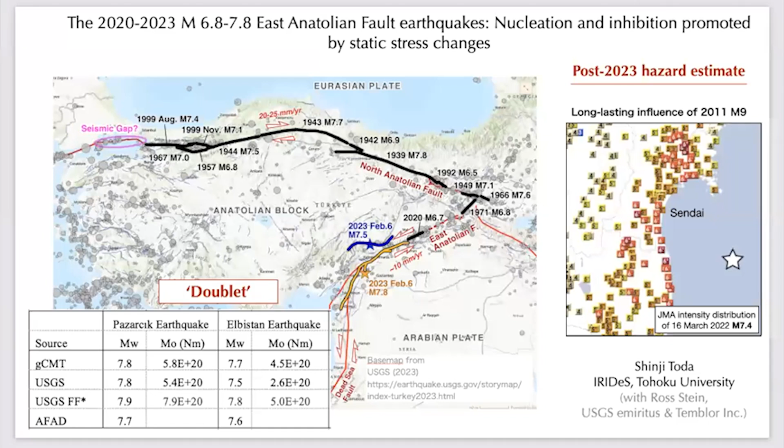We had magnitude 7.4 and 7.3 earthquakes that struck Sendai last year and two years ago, and the influence of a large earthquake often lasts longer than decades. So what about the situation in Turkey? Today I'd like to briefly introduce the seismic hazard after the 2023 Kahramanmaraş earthquake. This is very important for the recovery and reconstruction process for cities damaged by this earthquake. To do this, fault interaction becomes key to evaluating the hazard.

We realized the fault interaction in the February 6th earthquake sequence itself at the beginning. It was what we call an earthquake doublet - two similar-sized events occurred within 9 hours of each other.

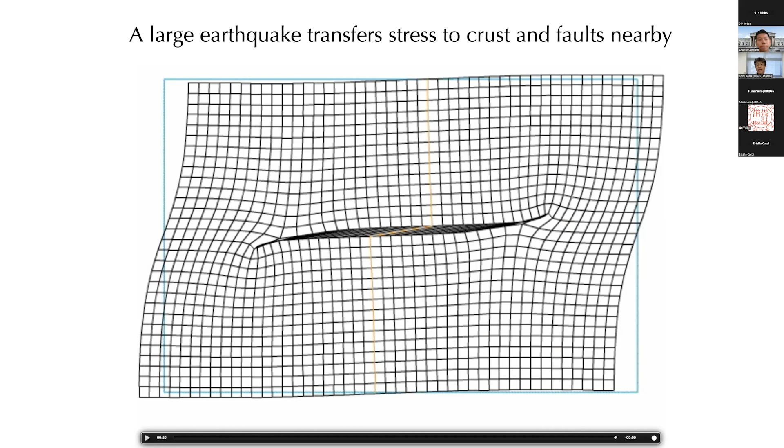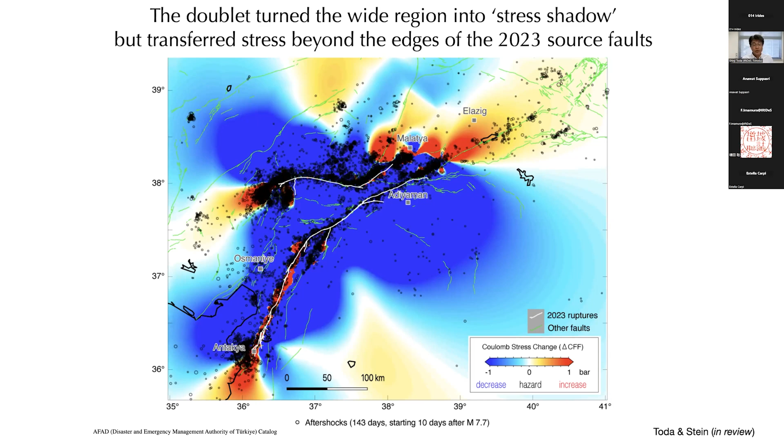As I said, some of the red spots are just beyond the edges of the ruptured planes. There are many aftershocks, of course, and this would be the next large rupture.

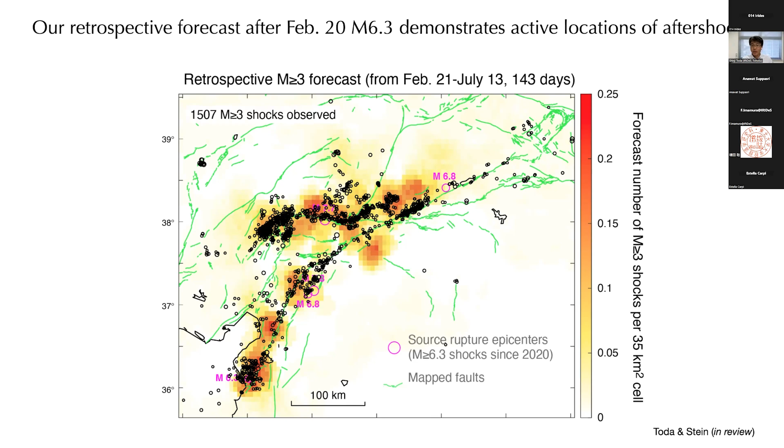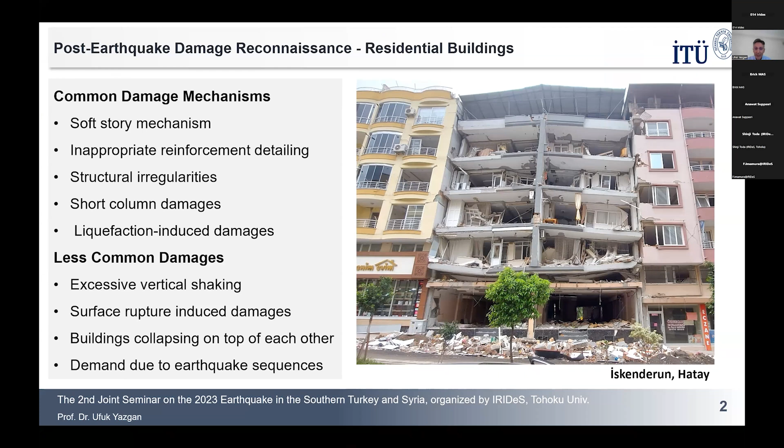One of the most common damage mechanisms observed in the region related to residential buildings was the soft-story damage mechanism. It's unfortunately a typical damage mechanism for building stocks in urban regions of Turkey. On a popular street, commercial businesses are typically located at the ground story, demanding large commercial areas there. This often limits the availability of resistant structural elements on the ground floor, creating softer floors, and we observe soft story damage and collapses of the ground floors of such buildings in seismically active regions.

Unfortunately, even though my title says lessons learned, this is nothing new. Such damage had already been observed after several earthquakes in the past, and there's no new lesson about it. The soft story damage mechanism for our building stock is one of the most critical and has been known to trigger lots of failures. It's very unfortunate to see it repeating itself over and over again.

Another common damage mechanism was inappropriate reinforcement detailing — lack of confinement, lack of the 135-degree bend of the confinement bars, which are very critical for ductility.

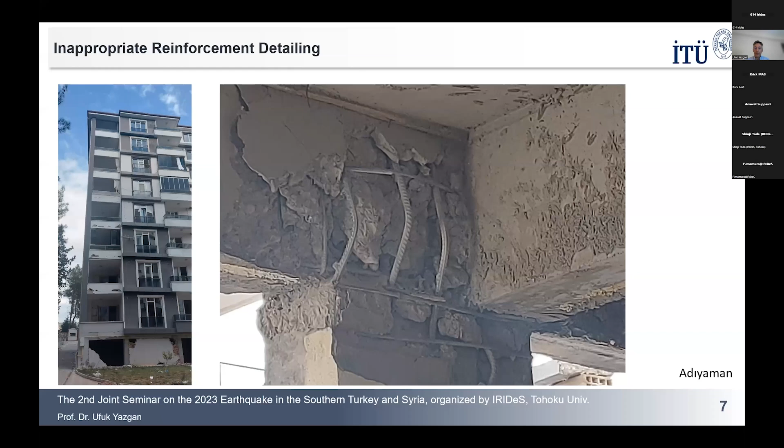So this is a building from Islahiye, Gaziantep with improper confinement detailing, reinforcement detailing, but unfortunately it was widespread around the region. This is a beam column joint constructed in the Adıyaman region, again with the lack of confinement in the beam column joint region. Unfortunately, again, there is nothing new about this. It's very unfortunate to say that these lessons should have been learned in the early earthquakes, so there's really no new lesson to be learned here, I should admit.

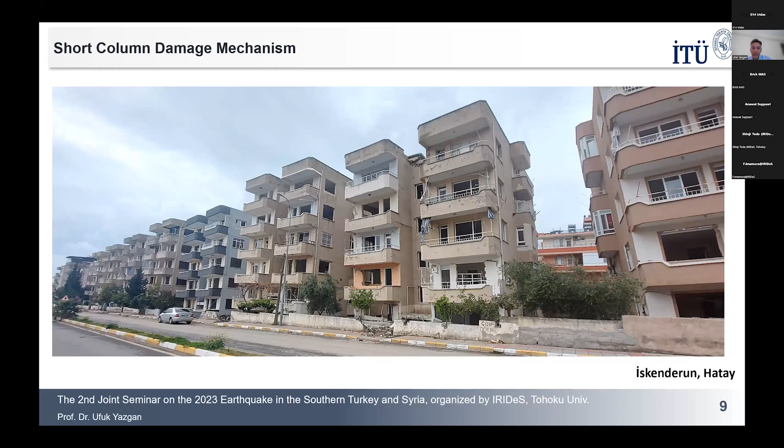Another very common damage mechanism observed in the early earthquakes was also observed in this one: short column damage. Typically those structures with ground floors that are a little bit flexible tend to be located partially in the basement level, sometimes fixated with the presence of infill walls, and these rigid elements limit the capability of the structural system to deform and go into the expected nonlinear action. Unfortunately, due to the rigidity of such supporting elements, this nonlinearity takes place in a totally unconfined and unexpected place, and this triggers losses. Sometimes these failures are repeated for large sets of buildings distributed over a full street or avenue, and when you look at the same pattern repeated at the basement floor, you again see the same error repeated over and again. Unfortunately, there's nothing new about any lesson learned here.

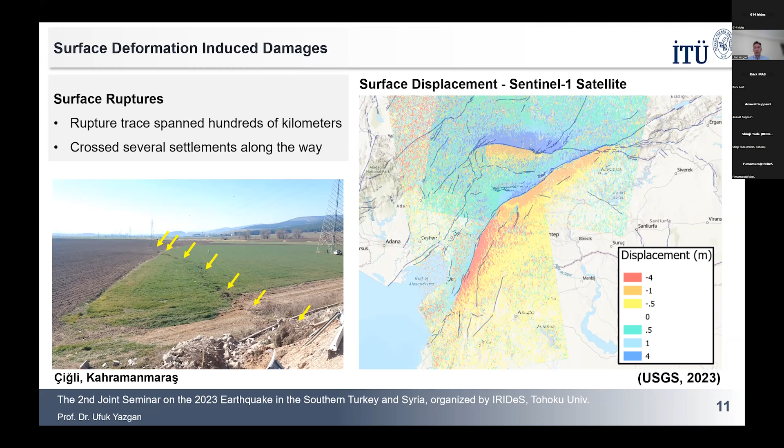But then there were some interesting phenomena that were not observed by myself, at least, in earthquakes in Turkey before. One of them was very long traces of surface ruptures due to such large magnitude events, a sequence of events actually with two main shocks. We have very, very long segments of surface ruptures and surface fault traces that pass through various settlements, and it was interesting to observe that such long traces, hundreds of kilometers of fault traces, damage structures in relatively different ways than typically anticipated for large magnitude events in the common seismic design codes in Turkey.

For example, this is a settlement called Çiğli in Kahramanmaraş, where the fault rupture trace just passes through the entire city diagonally, the entire settlement village diagonally, and then all the structures had significant settlements at their foundation levels.

Of course, these are the ones directly at the rupture, but the surface deformations are not only limited to the rupture. In some cases, you really observe large settlements and differential soil movements 4 or 5 kilometers away from the fault. This triggers both structural damage as well as non-structural damage, which can also be critical to structural systems located around infrastructural elements such as retaining walls, tunnels, bridges, and so on. When these systems interact in their response against earthquakes with neighboring buildings, it creates a problem. We have been studying these differential support settlement effects in buildings for some time in our group, so it was quite interesting to observe that.

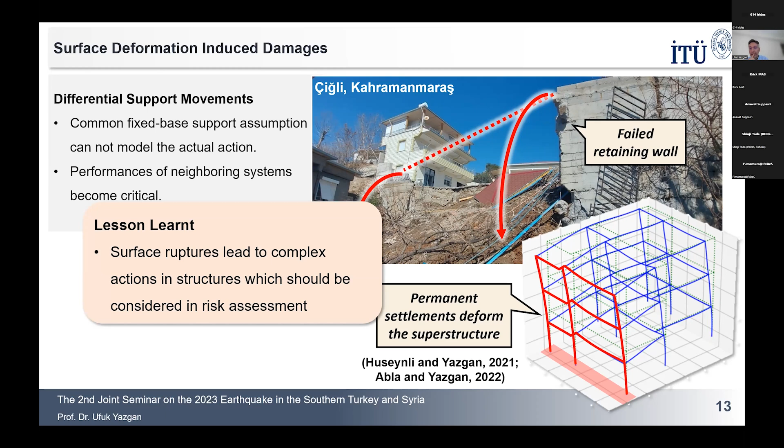It basically teaches us a lesson about very large intensity but rare probability, rare frequency events. It looks like those events cannot be just captured by changing the design acceleration levels as we do today. It looks like those large intensity events essentially trigger also very significant surface deformations at the support of the buildings, and these should be handled very carefully by engineers using some other innovative approach to deal with them.

Another thing that became quite common after this earthquake is that in regions with large densities of population, buildings collapsing on each other also triggers significant amounts of losses. This is a photo from Elbistan, Kahramanmaraş, which is at the epicenter of the second earthquake. This damage in this RC wall is non-expected earthquake damage, essentially, because it was created by a neighboring building just falling on top of this one, which collapsed not only onto that structural wall but also onto several structural elements at different locations of the building.

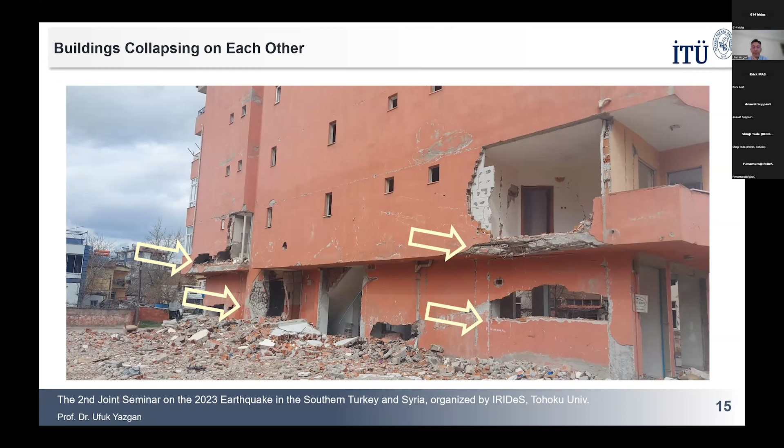This shows that the safety of the structure as the engineer designs it is not only controlled by the structural parameters of the building itself, but the risk and post-earthquake functionality is a function of the performance of the neighboring building. Also in this case, the neighboring building just collapsed into the ground floor of this building, which is not a pounding type of damage. It's just direct collapse, and it punched the ground story columns of the building next to it.

So basically, for buildings located near high-risk structures, separation distance needs to be considered in risk assessment. This is not related to pounding on the structure, where buildings impact each other during vibration, but due to the fact that the next building can collapse onto the other one, which can trigger significant losses.

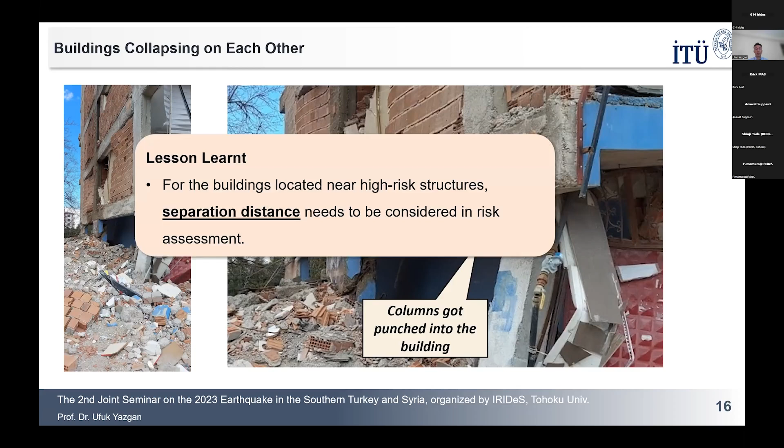Also, in some cases, the collapsing of non-structural elements creates large problems. For example, in this case, we observed non-structural debris falling onto the evacuation roads of people trying to get out of the building.

This was an earthquake sequence, with two earthquakes arriving with a time difference of 9 hours, followed by a very active aftershock region. Of course, people need to get out of damaged buildings as fast as possible, but it looks like non-structural elements located on evacuation roads are something we, as engineers, should think about more carefully, particularly designing them against high-intensity accelerations.

Another interesting observation related to this earthquake was the excessive vertical accelerations that were recorded and observed. Here you can see a building in Antakya, Hatay city, which had very significant damage located in the weak zones at the tops of the RC walls.

This is a relatively unexpected damage failure mechanism for an RC wall to have such an impact, but you can see it at all the columns of all the RC walls of each story. This damage mechanism is repeated.

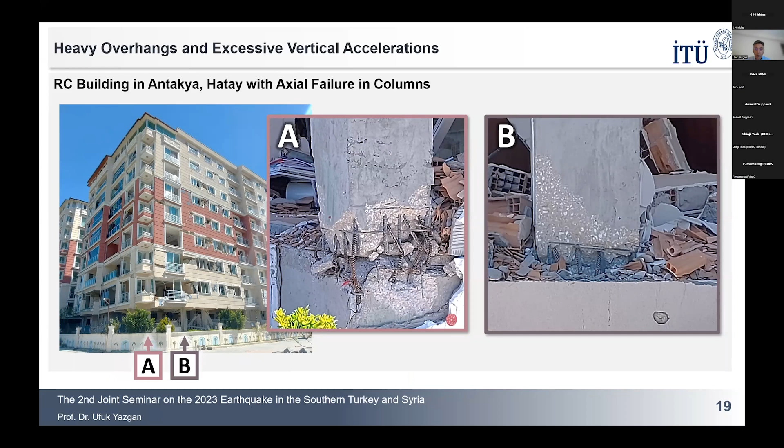At the bases of the structural column elements, we had very sharply divided individual cracks that had opened during the earthquake. Also, at the relatively heavier weight cantilever elements, we observed significant traces of structural damage.

All these damage patterns indicated that there should be quite a large vertical component that excited those buildings. The security camera footage from the region also confirmed that.

We can see security camera footage from the entire region, where at the very last seconds of the recorded sequence, we can see cars jumping in the air due to vertical acceleration in the parking lot. The acceleration recordings obtained in the region confirmed this.

For the AFAD 3123 station, for example, the vertical acceleration exceeded the horizontal components. 0.88 G was the vertical demand, whereas 0.61 and 0.67 were the horizontal ones.

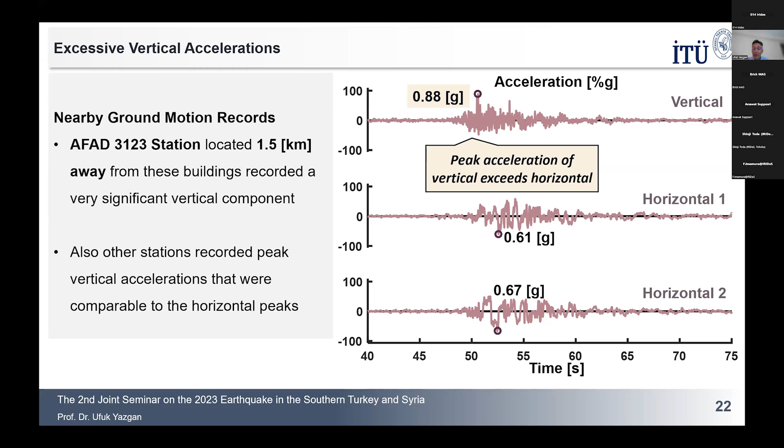What is more interesting to note is that the vertical acceleration actually arrived at the structure a little bit earlier than the horizontal shaking, because in seismic design and assessment of structures we typically focus on just identifying the peak amplitudes of the demand. But the sequence of arrival of those demands is also a critical factor, which is not always taken into account, particularly for vertical acceleration.

We observed that for large intensity vertical shakings, the arrival time difference tended to be, on average, positive. For larger vertical accelerations exceeding 0.3 G, the vertical demand arrived a little bit earlier, at least a couple of seconds earlier than the horizontal one, which may indicate that before the horizontal loading intensifies at the design level, we may have significant vertically induced damage in the plastic hinge regions, which may be quite important.

There are some mechanical reasons for that behavior as well, related to the fact that P waves, which transmit vibration to the surface, arrive much faster than S waves and tend to attenuate much less. We are currently working on this effect, and the amplitude and arrival times of vertical accelerations are critical. This is a key lesson learned from this earthquake.

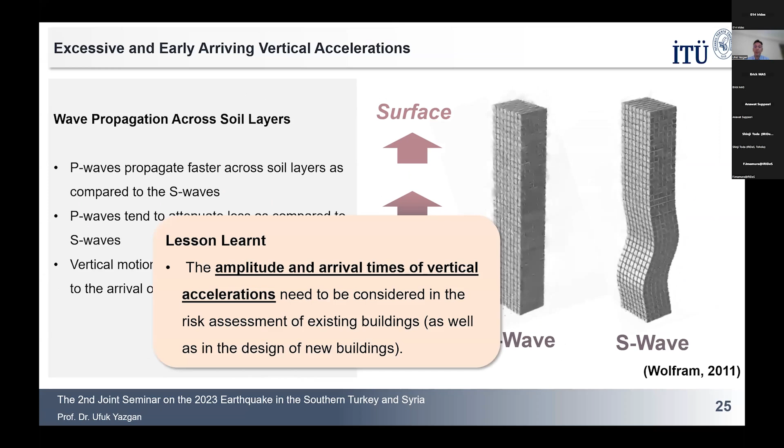And then, of course, another key issue, as addressed by the fellow speakers, was the fact that this earthquake was a sequence.

Large earthquakes distort the stress fields around them, and tend to trigger other main shocks. As earthquake engineers focusing on the design and assessment of buildings, we should take into account the fact that doublets of earthquakes can occur, where the excitation is repeated over and over again, because this is a fact for low probability, high amplitude earthquakes.

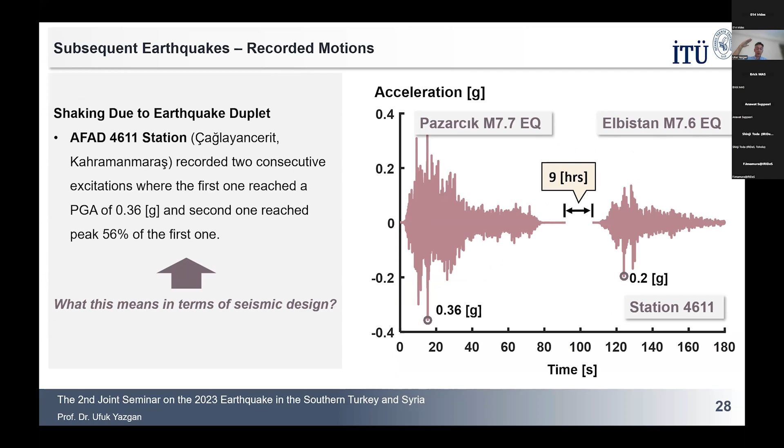It looks like for high magnitude events, which distort the stress field in neighboring faults, we should take into account the fact that potential losses may be triggered due to an earthquake sequence rather than an individual earthquake. I would like to acknowledge all the organizations and individuals that contributed to this investigation, and thank you for this opportunity and for organizing.

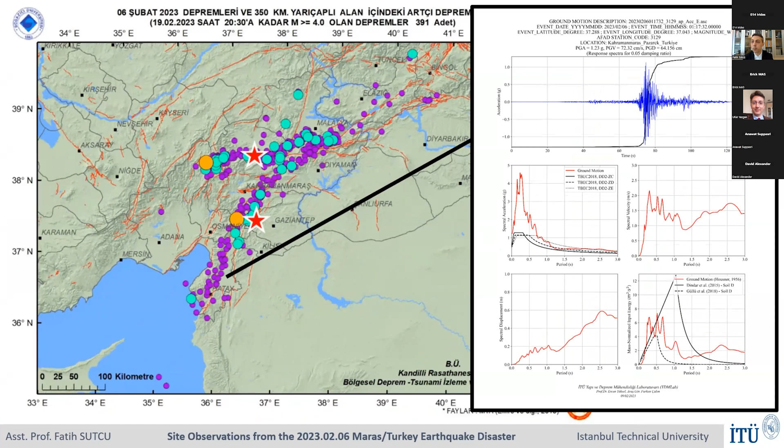This is the Maraş area, and I will show you lots of photos from there. The recorded PGA here is 1.23 G, which is quite large. And for the Antakya area, it is approximately 1.2 G.

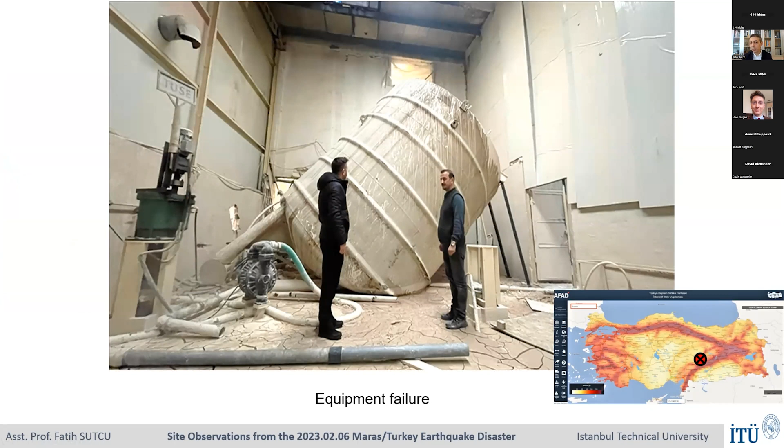This is also in Maraş area. This one is a little bit in the northern part, but as you see here, we also observe an equipment failure because its supports weren't properly designed and constructed.

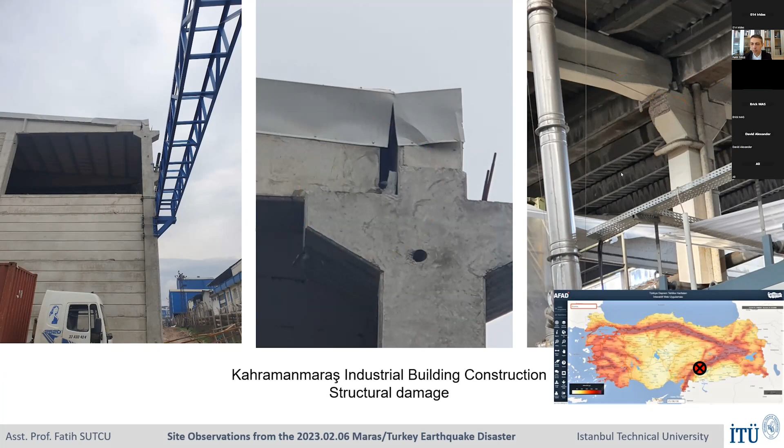This detail, the column and beam detail, this is how it's done. Unfortunately, you see there is only one pin. These are generally 10 or 12 millimeters in diameter. And you see that during an earthquake...

Okay, so this is the pin connection, you see. This is obviously quite a weak connection for this kind of heavy and big structures subjected to large earthquake motions. So from now on, for the new constructions, obviously there should be more pins, right? It's not just one, but there should be at least four, and then they should be restrained from the top, so these connections will be safer. You can also form some kind of joint with moment transfer capacity, which I will show in the coming slides.

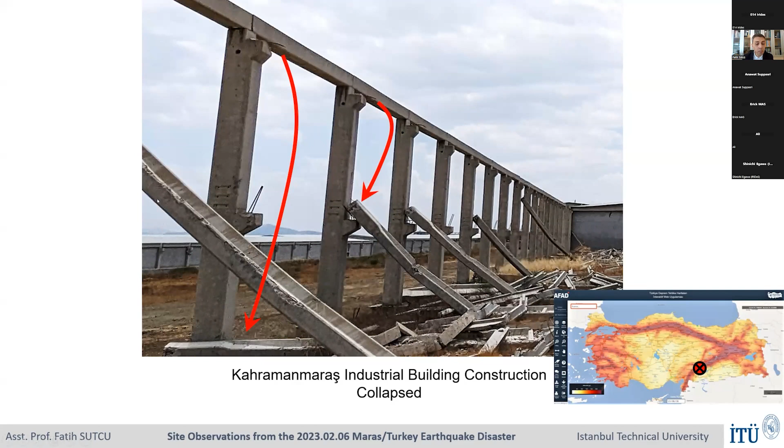Which hasn't been constructed yet, or it can be also used for a kind of crane beam. But anyway, these large beams have fallen all the way from the top. The same condition is also on the other side. You can see these gussets are okay, these gussets are okay, but the main beams have fallen all the way from the top of these columns.

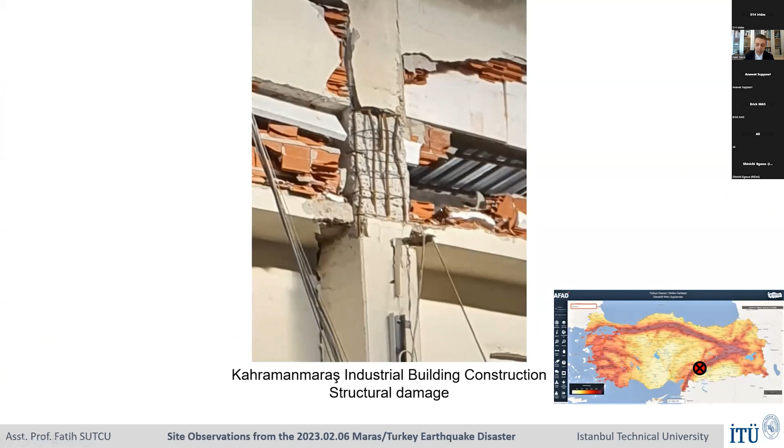So what can we do for retrofitting, or at least improving the condition of these structures? First of all, we can provide a rigid or semi-rigid connection between the columns and the main beams, connecting all of them together, including the gusset plate.

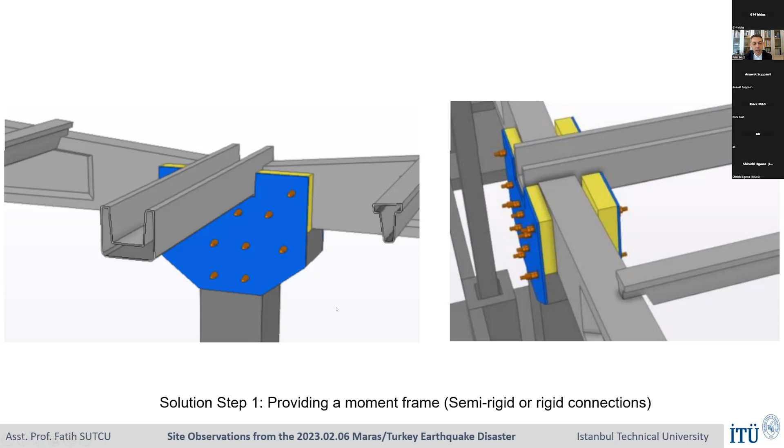In the seismic regions in Turkey, currently there are lots of ongoing works like this. So instead of those very poor connections between the columns and beams, now this kind of semi-rigid or rigid connection is provided to improve the condition of the structure in the beam direction. Also for the secondary beams, this kind of improvement with steel connection members can improve the condition of the secondary beams and prevent their falling. Additional members can be added in the transverse direction to improve the structural integrity.

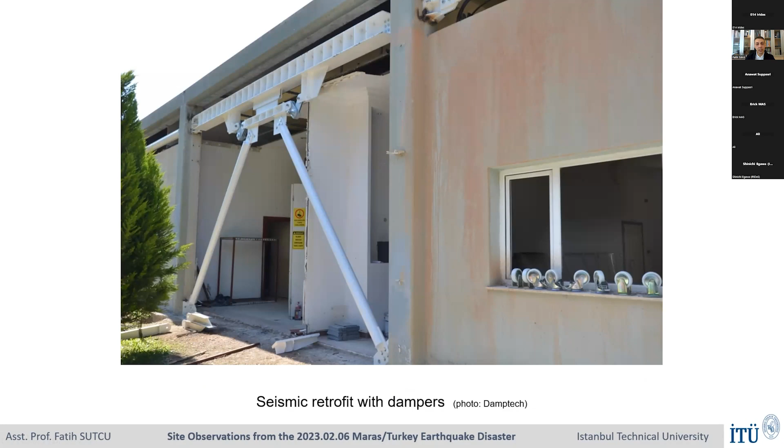And this one is another type. Here you see this connection, which is the same connection I have shown you just before - you see there is no moment transfer capability of this connection, so we can use it to our advantage. This is a knee-type bracing, and using this knee-type bracing and the rotations in this joint, we can make the damper work against the earthquake.

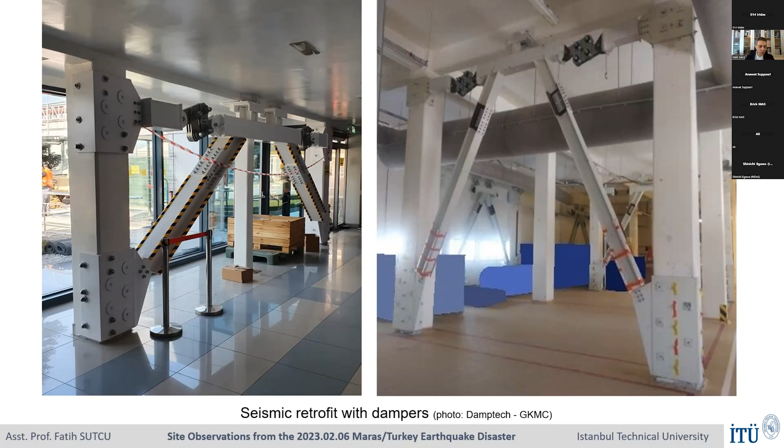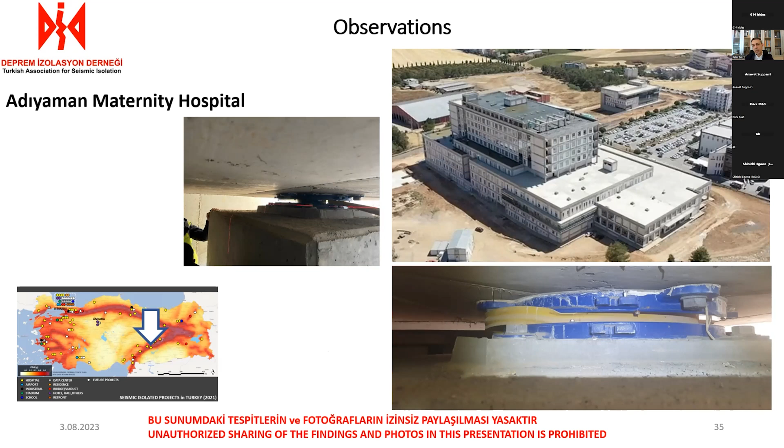And another one from Adıyaman Hospital. I have visited this hospital after the earthquake, and we have used laser meters or some special camera gear to see the internals of these devices, to see the friction marks. This one is still under construction, but the building has no damage.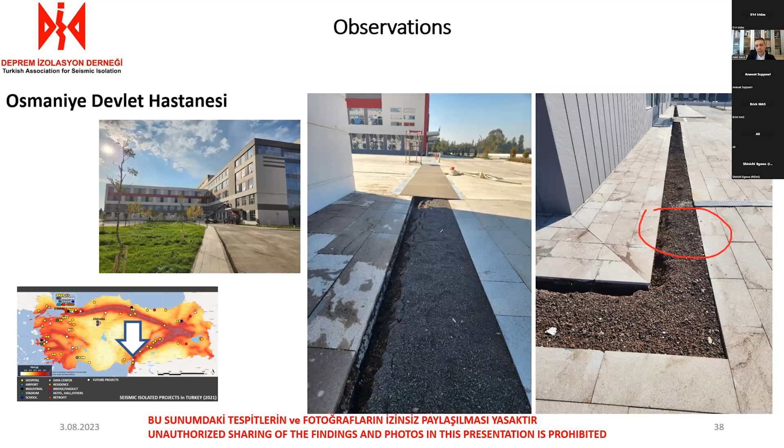Another hospital from Osmaniye, you see surrounding the building there's a seismic gap. Unfortunately, the seismic gap is filled with, this is not earth, this is pumice stone. It's quite light, but I think the amount is a little bit too much, so it kind of restricted the building from moving freely. So the building administration is now removing this kind of filling, or rather we are expecting them to remove it.

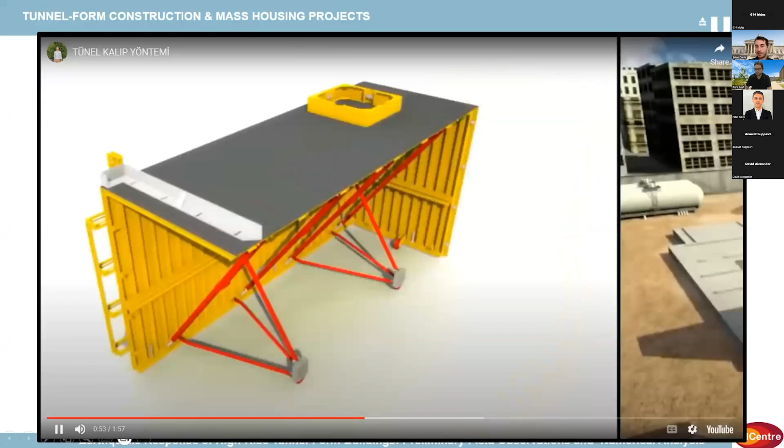To demonstrate this, there's a short video. Basically, these buildings, in contrast to conventional reinforced concrete frame buildings, are built using these interlocking prefabricated formworks.

So these formworks are placed for each floor, and after the concrete is poured and cast within the cavities, the same formwork is taken out from that floor and put onto the floor above. This procedure is followed repetitively, and it allows faster construction.

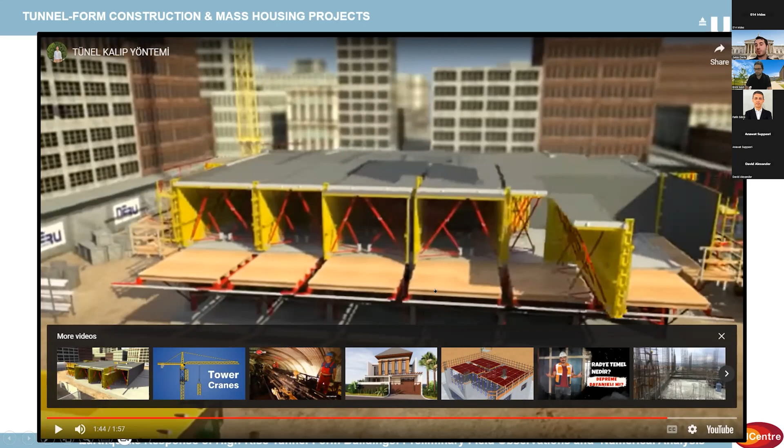But as you see from the previous images, all are coming from Turkey, and they have quite similar floor plans and similar exteriors. The reason is that the formworks are built specifically for a specific project, and they are being used for almost every building in a mass housing project.

In addition, considering the construction year of buildings in Turkey, we can anticipate that these tunnel form buildings will continue to be main actors in mass housing projects, especially following the 2023 earthquakes in Kahramanmaraş.

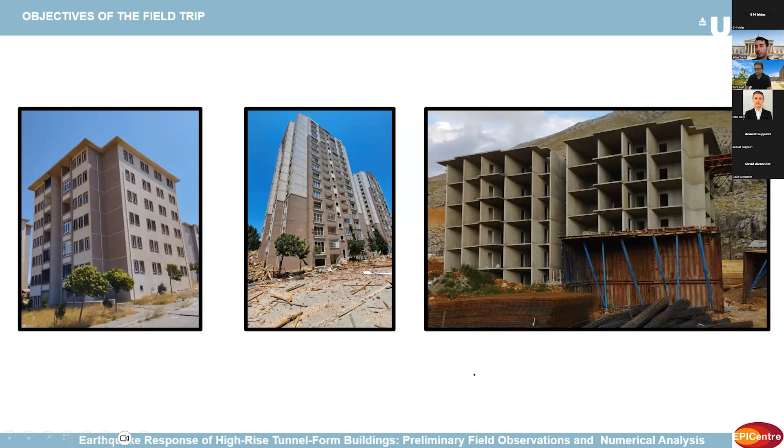In the field, we observed that these buildings suffered less non-structural damage compared to reinforced concrete frame buildings.

As explained previously, these buildings are made with a special formwork technique, which results in a high density of shear walls on every floor. Their structural system is basically composed of shear walls, slabs, and beams, whether frame beams or coupling beams, but the main vertical load-bearing member is the structural wall.

We can say they almost have no columns on any floor, which leads to a stiffer structure compared to reinforced concrete frame buildings, and they deform much less. As a result, the contribution of infill walls is quite limited, and the damage compared to reinforced concrete frame buildings is less severe.

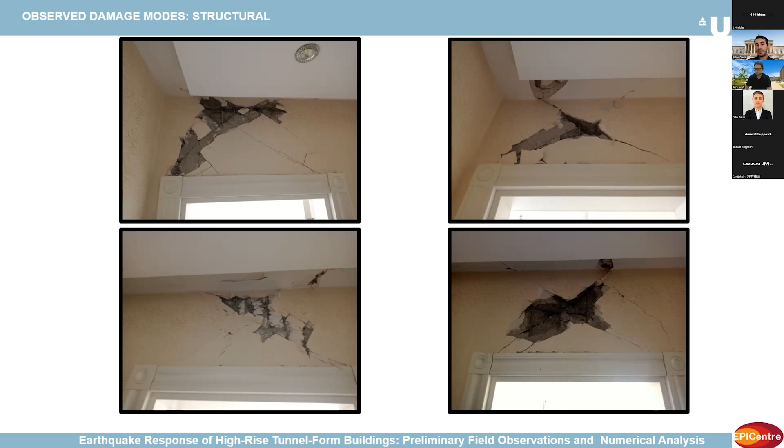Furthermore, we have also observed severe shear wall damage on this typology in different locations. The damage was progressing from the clear cover to the interior sections of the shear wall, starting as spalling and then progressing with crushing of the core concrete, buckling of the reinforcement bar at the boundary region, and if the ground motion was severe, the damage progressed to the web region as well.

We also observed improper reinforcement workmanship and insufficient lap splices. Also, the transverse reinforcements did not have 135 degree hooks, but 90 degrees instead, which caused them to open up under high axial force levels and propagate the damage further.

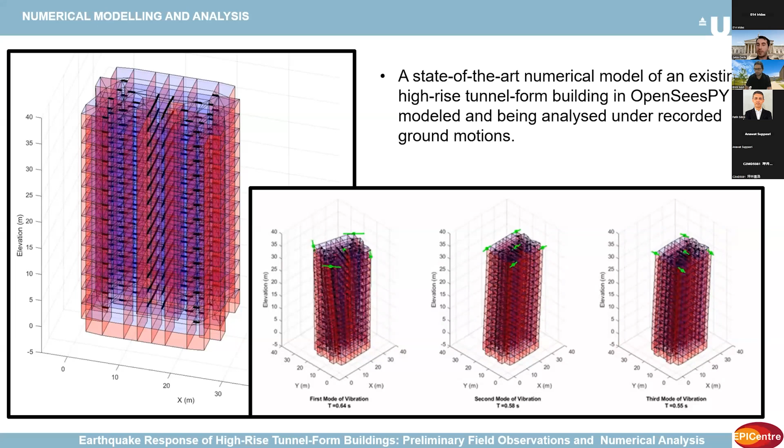This is an ongoing procedure, and we are trying to further understand the damage mechanisms and their progression throughout the earthquake histories. To conclude our study, we can say that compared to reinforced concrete moment-resisting frame structures, tunnel-form buildings performed better, and we observed that an extensive reconstruction effort is revolving around tunnel-form buildings in many locations.

In specific locations, we observed heavily damaged tunnel-form buildings with severe damage on shear walls and also coupling beams, which had a significant role in the dissipation of seismic energy. Overall, the observed damage was consistent within each project at each location, as opposed to RC frame buildings, reflecting a common quality amongst these buildings.

Although these buildings performed better, they still need to be scrutinized regarding the observed damage patterns, because many of them were quite brittle and will push the structure into non-economical repair situations. This study will be followed up by a detailed investigation of the issues through numerical analysis campaigns. I would also like to acknowledge the valuable support of EEFIT in realizing this field mission.

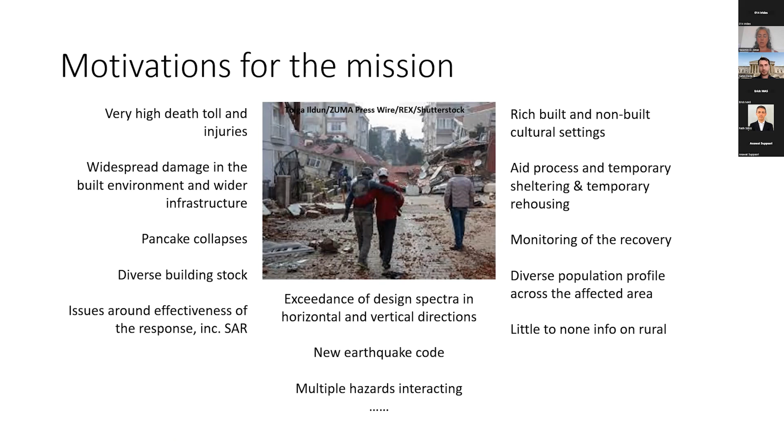I am not going to dwell too much on the background, but as EEFIT, we had very strong motivations to study this sequence of events, which includes, but is not limited to, the very high death toll and injuries, and the very rich, diverse building stock that the affected areas offer us. Of course, as mentioned before, there was exceedance of design spectra in both horizontal and vertical directions. But what I want to reiterate here is that we were very much interested from the beginning in monitoring the recovery, which we are doing, as evidenced by our multiple visits to the site.

Our first field trip to the area took place in March, and it was the first mission with 15 team members. It was very broad and multidisciplinary, with team members focused on strong ground motions, geotechnics, structures, infrastructures, and relief response recovery. To some extent, our focus was on rural areas, because at that point there was little or no information on how rural buildings were affected and how communities were impacted.

So we spent quite some time looking into rural as well, in addition to visiting the main city centers. In April, there was a second field trip that focused on monumental structures. It was a 10-day visit that looked into a number of monumental structures, documenting the damage, the geometry, the materials, and also the damage in them.

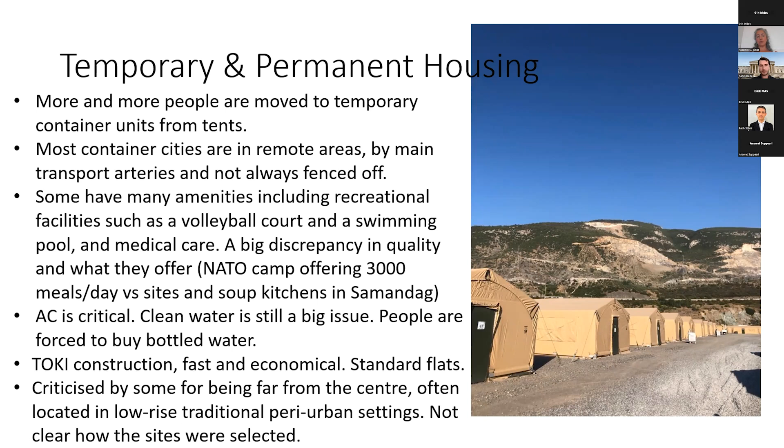These are criticized by some for being far from the city center, often located in low-rise traditional peri-urban settings. We have also visited and discussed the situation with municipalities and other units responsible for local planning, but we are not clear on how the sites were selected.

I'm going to very briefly talk about the building response. The building stock is primarily composed of RC structures, and as Ufuk Hoca already discussed in his great presentation, the key messages do not change. Unfortunately, we keep discussing the same issues, problems with the full life cycle of the structures: design, implementation, and post-occupancy. So I wasn't planning to talk much about this anyway, and now it's completely redundant, so I'm going to pass.

One thing we also try to highlight in our mission lecture is that this area is very much covered by a modern non-engineered building stock. This is very common in this area, and in the entirety of Turkey. There's also informal housing, not only in rural and peri-urban areas, but definitely also in urban areas. We see these sorts of structures very, very commonly.

As a note to the rest of the post-disaster reconnaissance community out there, these are very complex structures, very hard to capture with standard damage assessment tools that force you to pick an RC structure, a masonry structure, and so on. These structures require a separate set of care for us to understand how they work, how they were impacted, and how they can be made more resilient to future events.

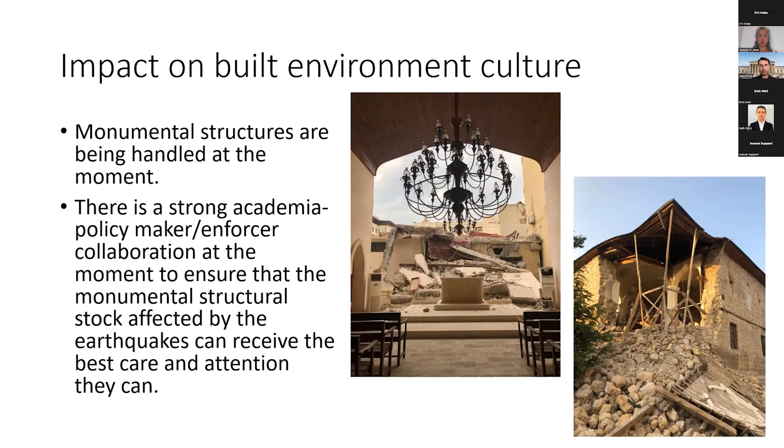What I really want to focus on in this talk is the unlisted traditional civil architecture, because this is very prominent in the whole area, and the area is very rich in terms of different typologies. I have personally seen many building typologies that I hadn't seen elsewhere - pockets that don't necessarily repeat elsewhere. There is clearly a very location-specific, context-specific traditional civil architecture that flourished in this vast area, where the culture and living culture is very different in all of these places.

I'm going to talk in more detail about Hımış right now, because it's quite common in Turkey and outside Turkey - in the Balkans, in Greece - in terms of broad construction principles, although the detailing, implementation, and material choice can be quite diverse from place to place. It is, to some extent, in quotation marks, a formal building typology.

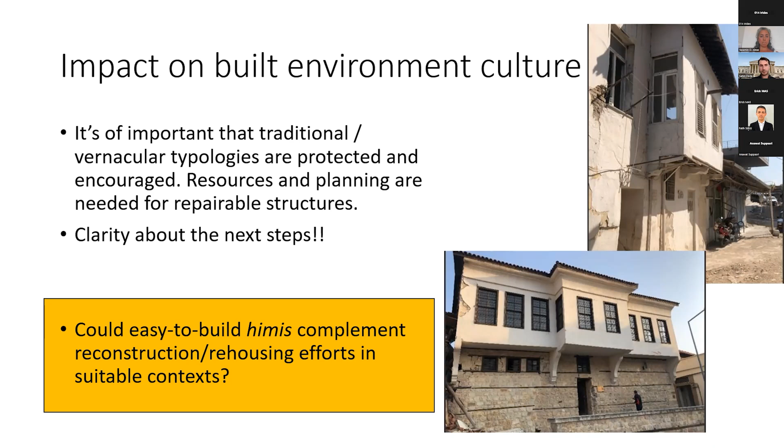Okay, so I'm going to wrap it up with some other observations on broader recovery, and make a brief summary. As I said, the recovery is happening. For example, when we visited the site in March, we saw that the streets were completely empty.

Also with the weather conditions, of course—it was completely dark. It didn't feel safe, and all the shops were shut, etc.

Now it is different, and with the liberties and pleasantness of the summer months, you can see that life is going back to the streets, even in the most adversely affected areas such as the Antakya historic bazaar. You can actually see that people are going back to normal, and the shops are restarting, etc.

But is this situation sustainable in winter, or does it actually show a long-term sustainable trend?

We don't know, and this view shouldn't lead us to think that everything is fine now in any form or shape, because safety hasn't been definitely reinstated in cities. Theft and scavenging are major problems, and we were reported so many theft incidents.

As I was saying, people aren't allowed to take anything from the demolished areas, but people actually do visit these sites, not for their own homes, but to areas where there is an exposed sort of corpse of a building, for example, and they take a lot of materials. We have also observed these things.

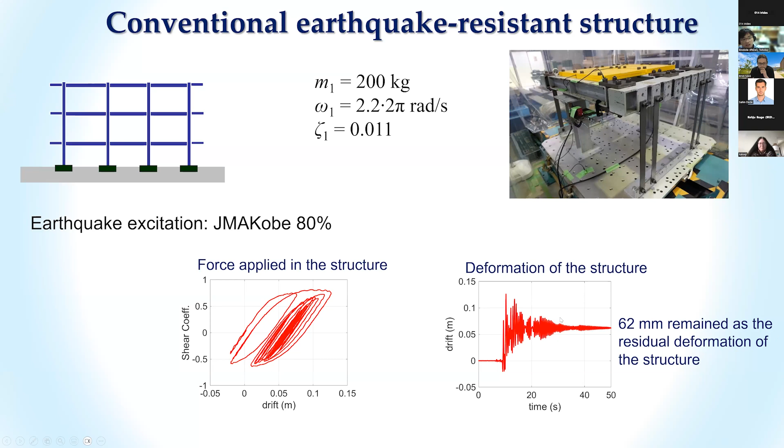These are the results obtained in this experiment. The left figure shows the force applied to the structure. The applied force was so large that the structure greatly deformed, as shown in the right figure, with a residual deformation of approximately 6 centimeters, indicating the severity of the structural damage.

Similarly, we conducted a shake table experiment using the freestanding structure shown in this picture. Its superstructure was identical to the earthquake-resistant structure. Its sliding interface was made using a set of mortar and iron, as well as graphite fabrication. The friction coefficient of the interface then became about 0.2.

In a shake table experiment using the same seismic acceleration record, we obtained this result. In this figure, the black line is the freestanding structure, while the red line is the conventional structure. The freestanding structure behaved as a base-isolated structure because it slid greatly, as you can see. Because of this sliding, the deformation of the superstructure became much smaller than in the conventional structure. Although this high seismic performance was achieved by the sliding, a residual sliding displacement of 12 centimeters remained.

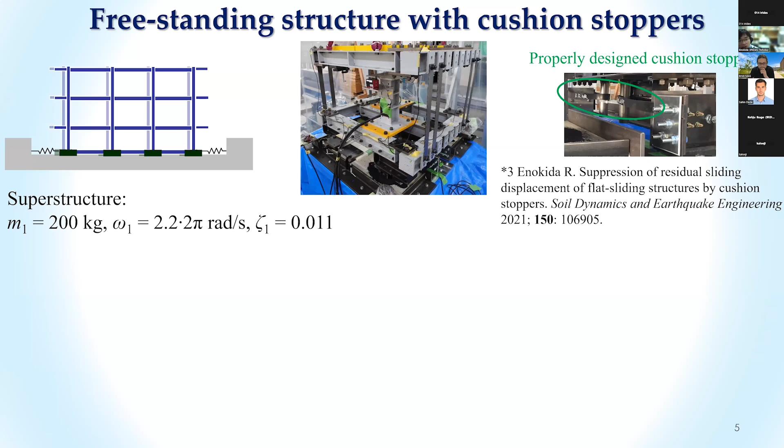We needed to solve this issue without losing the beneficial structural performance gained by the sliding. To minimize the residual sliding displacement, we came up with the idea to incorporate cushion stoppers and establish a reasonable design for them, then examined their effectiveness through a shake table experiment. We obtained the following result: the blue line is the freestanding structure with the cushion stopper. This structure also slid greatly, as you can see.

So in this case, the residual sliding displacement was only 1 centimeter, which was less than 10% of the normal freestanding structure. The deformation in the superstructure with the stopper was nearly the same as that of the freestanding structure without the stopper. So this experiment clarified that we can solve the residual sliding displacement issue without losing the high seismic performance of the freestanding structure.

So I now show you the experimental movie for the case with cushion stopper. The left bottom is a clear close view of the sliding interface, and its top is a cushion stopper. So from this movie, you can see how the freestanding structure moves after an earthquake and how the cushion stopper works for the suppression of the residual sliding displacement.

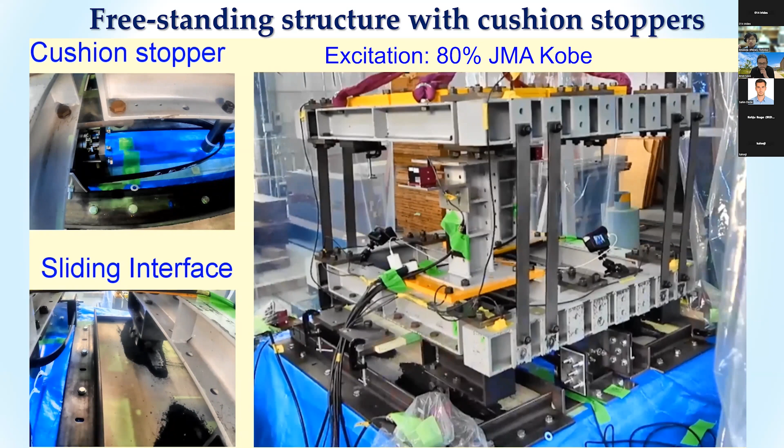So this is the conclusion of this study. A freestanding structure based on the graphite fabricated mortar steel interface is greatly effective for seismic damage mitigation. The freestanding structure equipped with a properly designed cushion stopper holds high seismic mitigation performance, simultaneously minimizing the residual sliding displacement. Finally, I'd like to emphasize that the freestanding structure can be achieved using common and inexpensive construction materials.

So we will further study to realize this freestanding structure in Japan and other countries such as Turkey. Thank you very much for your attention. Thank you very much for your presentation.

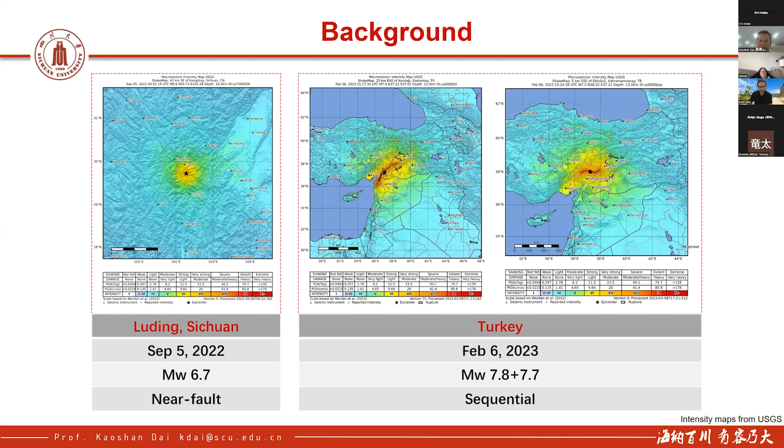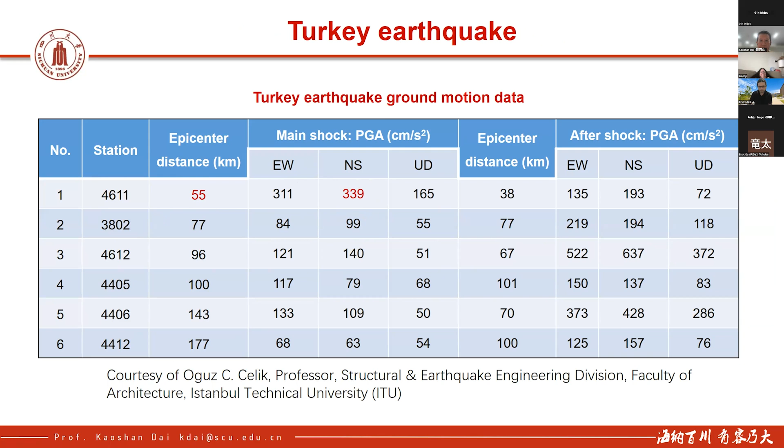This is the Turkey earthquake, and there are two sequential earthquakes we put together. We try to study, with this sequence earthquake, how the building performs and how damage occurs through numerical study, and then we'll go to Turkey in the fall to see what the real cases look like.

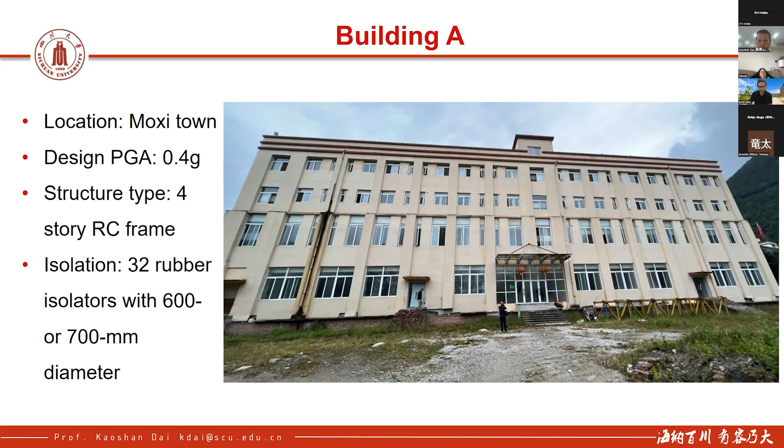Let me focus on what we found last year after the Luding earthquake. I'll show you two buildings. The first is a base-isolated frame structure - an RC frame with 32 rubber bearings, diameter 600 or 700 millimeters. In previous talks, some researchers showed good cases of base isolation technology, but I'll show you this is a negative case. I think it's not a good case - this building was damaged during the Luding earthquake, although it was smaller than the Turkey earthquake. This is the isolation gap, where the gap cover fell off, and with the ground motion it moved about 30 centimeters.

As I said, these two buildings are very close to the epicenter, so there's pulse-like ground motion, which is probably one of the reasons that caused this damage. This shows how the wall was damaged after the earthquake.

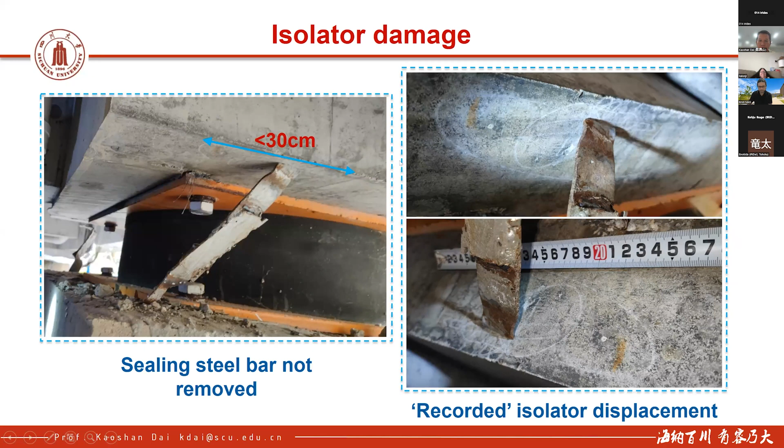This shows how the base isolation structure moved during the earthquake. There were some sealing steel bars not removed after construction, and they left circles on the concrete surface showing how the upper and bottom layers moved during the earthquake - almost 30 centimeters recorded. This building, a hotel and dormitory building, was not used after the earthquake and needs to be repaired, as all the dampers were damaged and need to be replaced. So this is one bad case.

Another bad case I'll show you here - this is a school building. This building is also very close to the epicenter, and they also used base isolation technology with 54 rubber bearings, plus 12 viscous dampers at the same isolation layer to provide more damping ratio for the structure. This is what we observed on site at its main entrance, and also at its connection with other parts of the building.

You can see that they moved greatly for this building, and the gap did not prepare well, and they have a rigid connection, which made this badly damaged. Also the infill walls have some cracking for this base isolation building inside, and also the ceilings, and some non-structural elements or equipment. All these things in the school were damaged.

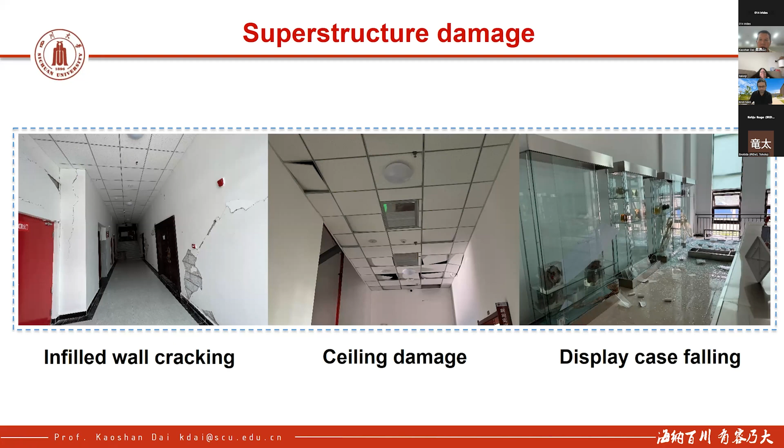Let me show you how this base isolation layer looks. All this dark color is lead rubber bearing. This one is natural rubber bearing, only the white circle, and these red connections are where the dampers, the viscous dampers, are located.

So after the earthquake, we went to the base isolation layer. We observed all 12 viscous dampers, and all their connections were badly damaged. The isolation layers, or the rubber bearings, are intact, which is good, but all the dampers are badly damaged.

Let me show you some pictures we took on site. This is two dampers. You can see the viscous damper buckled here, or either here, and the connection is pulled off from this concrete. For these two viscous dampers, the connection for the damper itself to the main structure is totally damaged and pulled off. The damper itself is okay, but the connection was badly damaged.

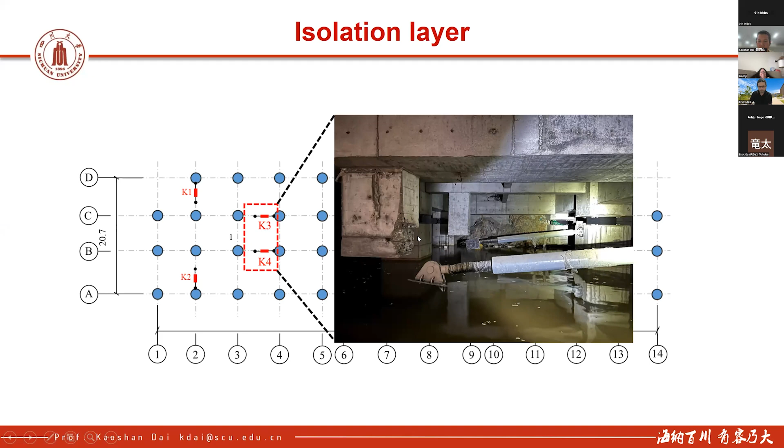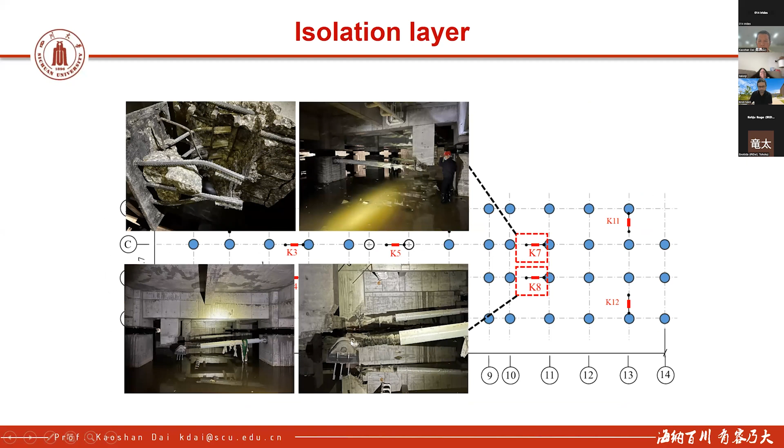This is another case in the middle of the structure, and you can see it's entirely pulled off from the connections. The viscous damper is okay, but the connection is badly damaged. This is another case in the middle, again with some bad damage to the damper connections. This is another case for these two dampers, also badly damaged for the connection. This one, for the damper connection again, you can see they were badly damaged during the earthquake.

Also some damage were found for other equipment like the pipeline. It should be a soft connection, but they were rigid, and so this caused some bad damage, with leaking of water from the pipeline.

So this would not be expected, as I said, for an isolated structure, but due to some design and construction problems, this building, especially at all these connections, dampers, and pipeline, was badly damaged. So this is what we found during the Sichuan Luding earthquake last year.

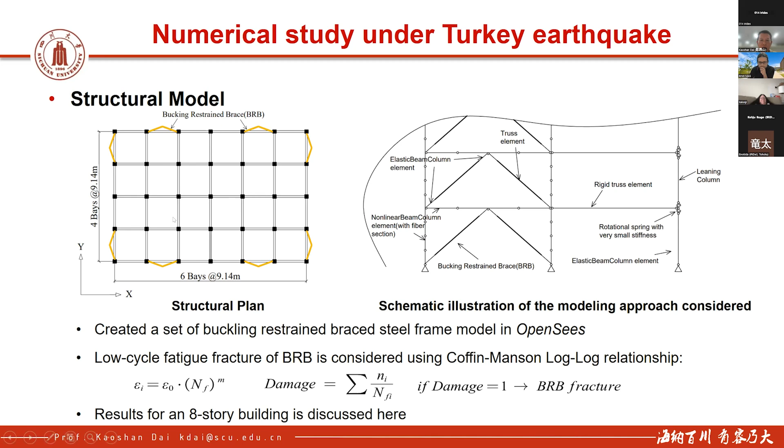As I said, we did not go to Turkey yet; we plan to go in spring, but the trip was postponed to fall. So I did a little numerical study to keep it short. I just show this building model, and we tried to use the sequence earthquake to see how the building model with BRB performed. This is what we got. I won't explain this numerical study work in detail.

So some concluding remarks: I think base isolation technology is good, but we need to use it properly, either in design, from design to construction, or we need to do things properly. As we found during last year's Luding Sichuan earthquake, about a 2-hour drive from our university, Sichuan University, we had some bad cases, which I introduced to you earlier, Professor. I think we should learn from that, even if we have very good technology in hand.

Okay, that's what I share. Thank you for listening, and thank you for your time.

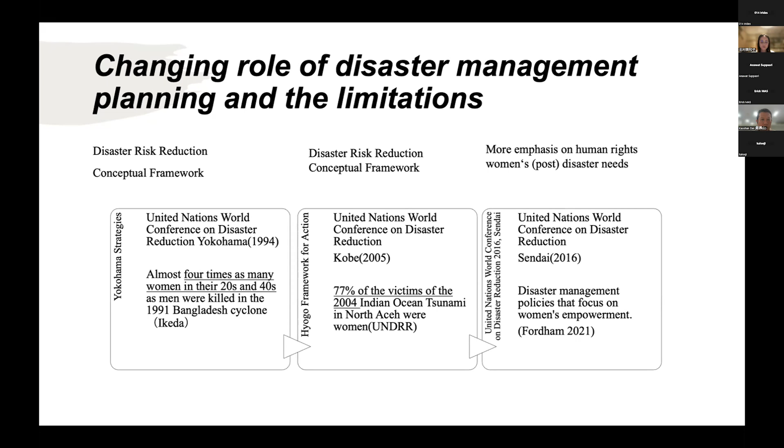So what is the gender gap situation in Japan among OECD countries? Japan's gender gap is quite low, and it has not changed very well.

Women account for around 40% of Japan's working population, nearly half. If women could work more equally, our economy might see more improvement.

So it means our countries should work together, and women's empowerment would improve both economically and in disaster risk reduction.

I would like to talk about an overview of the Great East Japan Earthquake, what exactly happened, and the gender perspective. It's very clear that many women were victimized during the disaster. Japan is an aging country, meaning it's natural that victims increased.

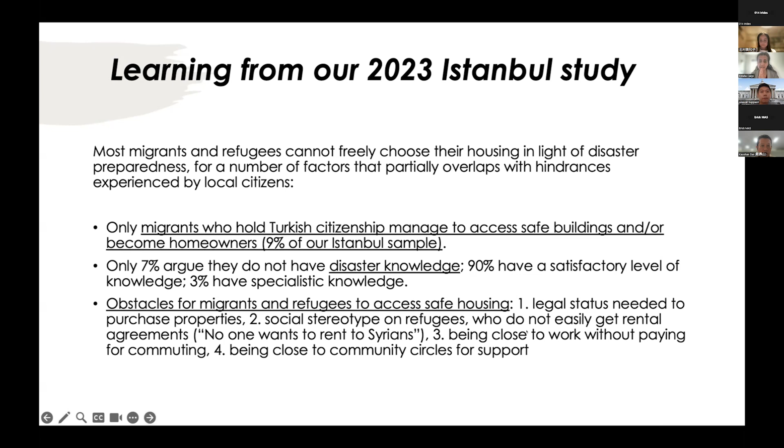So if we can get to the next one so that I wrap up this. Basically what I'm trying to advocate after this desk review study and empirical study with the refugee and migrant populations in Istanbul is looking at disaster and conflict all together as two sides of the same coin, whereas contemporary scholars tend to focus either on one or the other, not just the two agendas and ways of operating, but even these people, these social groups, are affected by a diverse set of factors.

And of course, we need to support refugee-led and locally led networks of solidarity and mutual aid. It's also important to take them into account when we develop disaster preparedness at a municipal level in Turkey. And also looking at both rural and urban livelihoods, and taking into account the physical environment characterizations of those, is something that we've been focusing on too little in the contemporary social science scholarship.

So in general, me and my colleagues that focused on the Istanbul study do advocate to still have this holistic approach to the affected society that populates most of the international and Turkish literature. But we also advocate for having more studies that have particular group specificities that can finally inform the holistic approach, because as we have seen, these group specificities can really impinge on the material possibility to achieve better and safer living conditions.

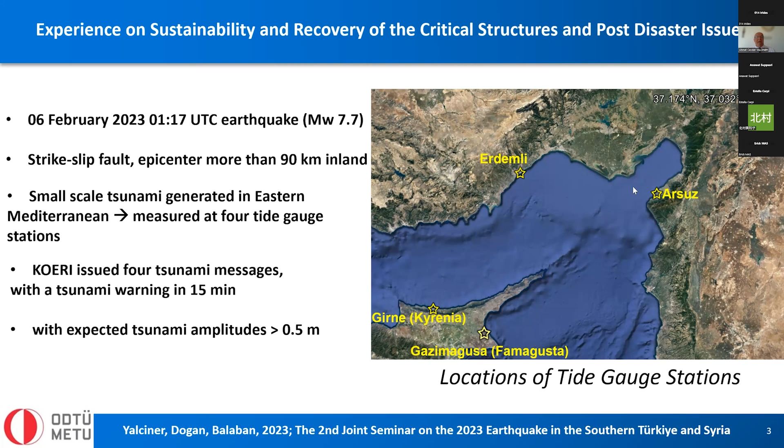We made eyewitness interviews and investigations about the water motions in the sea, and emergency actions done by critical coastal plants, because even though there was not a strong tsunami, there was an effect of the earthquake on the critical plants.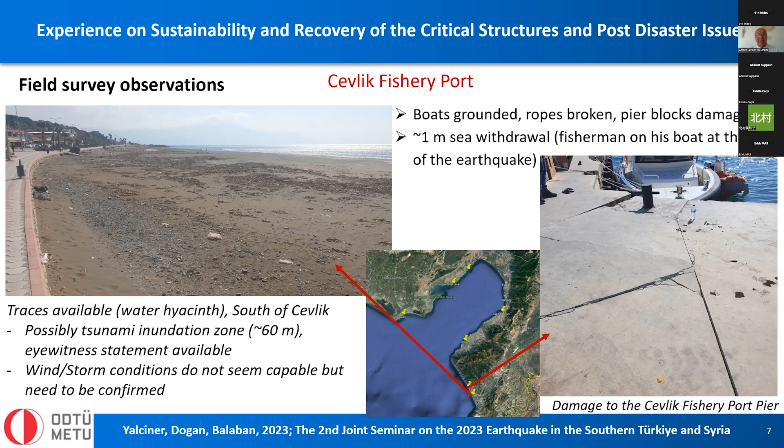There were cracks and damages at the Çevlik fishery port, and boats were grounded in the harbor due to water subsidence inside it - about 1 meter of subsidence. Fishermen reported this event. The Iskenderun fishery port and nearby Iskenderun commercial port also experienced some damages.

One example was at the Iskenderun fishery port, where you can see damages at the port facilities, shown in other photographs on these slides. There was also a fire at the Iskenderun commercial port, which was significant - it took 5 days to extinguish the fire at the site. This information comes from international news sources.

There are many fishery ports and marinas at these sites. Karataş fishery port is one of them, where a rope was broken by a Coast Guard boat weighing 22 tons. 5 to 10 minutes after the earthquake, the boat moved due to strong currents and fluctuations and 50-60 meters, with withdrawal of the water observed by Navy personnel from the Coast Guard.

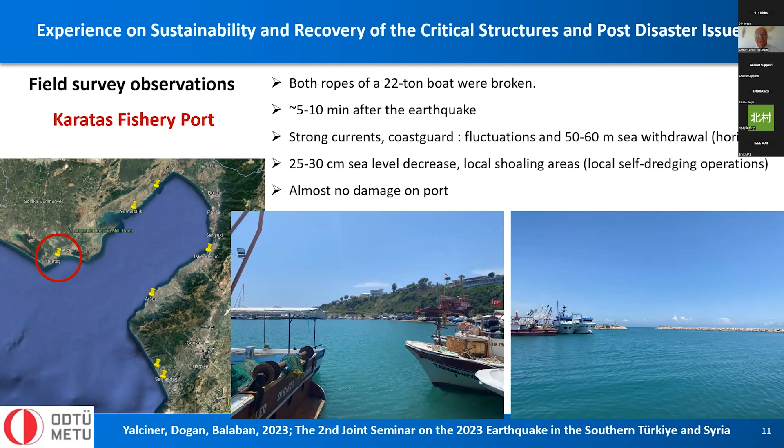Near Yumurtalık fishery port, one boat sank - it was dragged from the offshore area and hit the breakwater, and due to the damage, it sank. This is one of the reports documenting that a boat sank after this event in Yumurtalık.

At Dört Yol fishery port, there were many reclaimed berthing places damaged due to earthquake shaking. These kinds of damages were observed mainly at fishery ports or small craft harbors, with the main reason being geotechnical issues at these ports.

There were many critical structures. One of them is the LNG terminal. It has 2 piers, Pier 1 and Pier 2.

A 1 meter water level rise was observed at Pier 1, then it reached regular level. Stern bollards of the boats were broken. The boat was a bit dragged towards the shore, and only one thin rope of a small boat was broken.

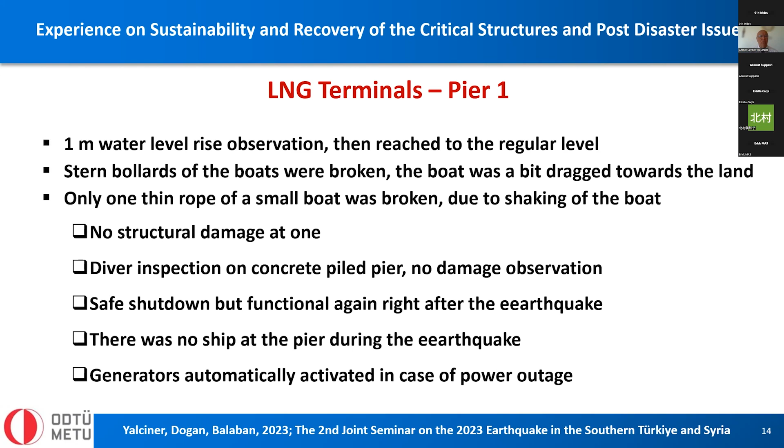The operators told us it was a very good experience for them to respond quickly under the emergency condition. At Pier 2, there were cracks between precast concrete blocks of the structure, cracks on the platform.

Very small cracks were observed in almost all of the piers. The connection between the pier and the beams is the critical point for these kinds of structures, which have to be designed carefully under extreme conditions like earthquakes mainly.

Repair operations started 1 week after the earthquake on this damage. The important lessons we can point out for future preparedness for industrial plants are: site investigation and soil analysis, to check if it is suitable for the plant structure, is essential.

Detailed analysis using all types of tools have to be used. Ethical issues, proper inspection during all stages of construction, and quality of the materials and construction workers are very important.

Identification of risks other than failure of structural components is needed, such as suspended ceiling and glass breakage collapse, failure in gas pipelines, and others. The secondary risk regarding fires has been experienced in this event, and it is almost common.

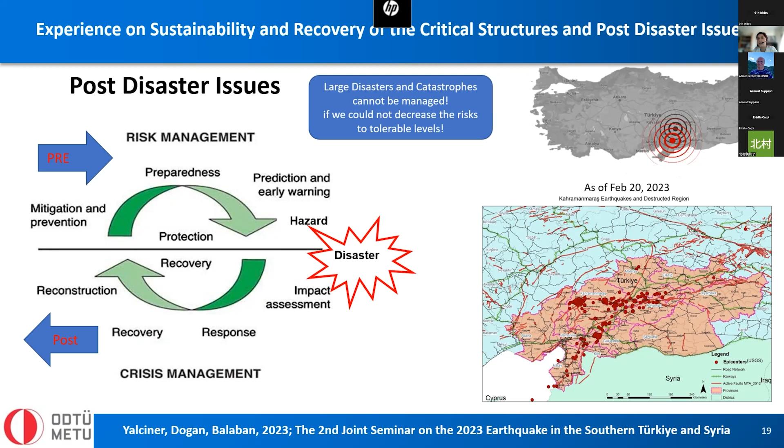When it happens, it becomes really complex, such kind of events, and difficult to save lives. Like after February 6 earthquakes, we experienced a devastation on an extensive region, as you can see from the map, affecting the whole country. Almost 6 months have passed, and now we are at the stage of recovery and transition for the reconstruction stage.

That toll, as of June 21, based on the official announcement from AFAD, is 50,783 people, plus the total number of missing victims. Of this figure, 7,302 people are refugees, and up to 107,000 were injured. At that time, 3.3 million people had been displaced, and almost 2 million people were being sheltered in tent camps, and then currently in container prefabricated settlements.

Here are some official estimations from the report of the Strategy Budget Department published in March 2023. As you can see, the total financial burden of the earthquake disaster for the country is $103.6 billion US, which is equal to 9% of the GDP forecast for 2023.

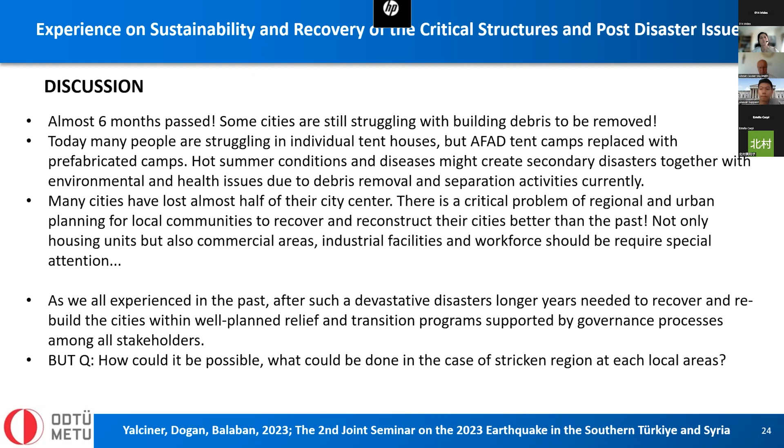By this way, I prepared this presentation. Thank you very much for listening.

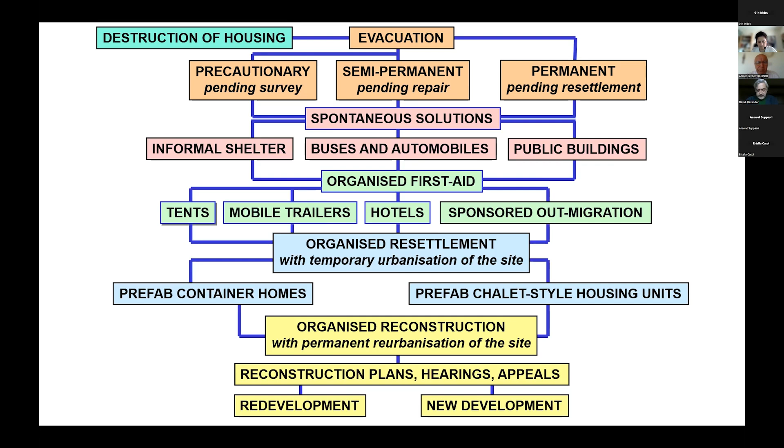We wrote a few years ago a book about this, which contains a number of principles, case histories and models, based upon our 85 years of collective experience. In this process, we proposed that there are several ways through the process of providing shelter after disaster destroys it, whatever be the cause, whether natural hazard impact or something else. Can we repair dwellings?

Can we do so in a timely manner? Or instead, do we require not merely spontaneous shelter, but some form of transitional shelter before we can get together the process of permanent reconstruction?

Let's remember that reconstruction is a process in which time is socially necessary. That is a very important point, but time is not an inexhaustible resource. There is, of course, always a tremendous imperative.

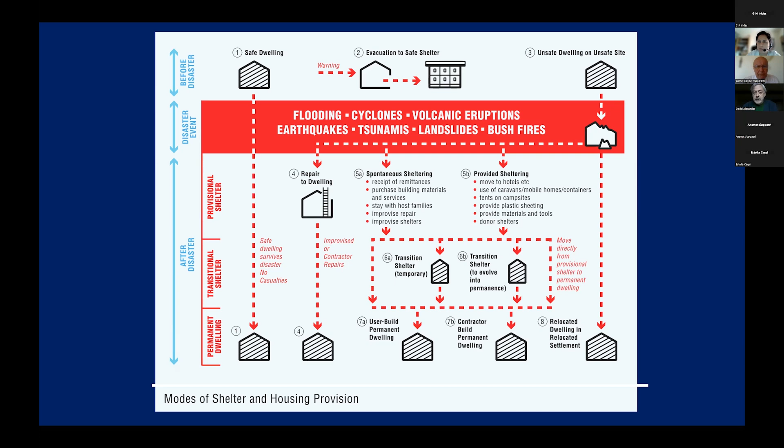When we have studied transitional shelter, we have quite often found that it isn't a transition at all. It certainly should be, but it is often quite difficult to see the connections between the early emergency and the later reconstruction through the process of transitional shelter, implying that it doesn't necessarily transition from one thing to another, as it should. That is something we need to think about carefully as we plan the process of recovery.

Let's also remember, when we think that time is socially necessary, that it takes time to produce an inventory of damage alone. Generally speaking, the first survey is a fairly superficial one, and if things are running well, it will move to a later survey where a considerably larger amount of data are collected, leading to enforceable decisions about what is conserved, what is repaired, and what is demolished, and therefore what are the consequences on housing and accommodation of businesses. It takes a considerable amount of time, usually months, to arrive at a final total of all of that, and to apportion which categories each dwelling or business premises will fall into.

Let's also remember that reconstruction is by and large the most expensive portion of the whole disaster cycle. Moreover, we might add 10% to the cost if we want reconstruction that is to some degree proof against future disasters.

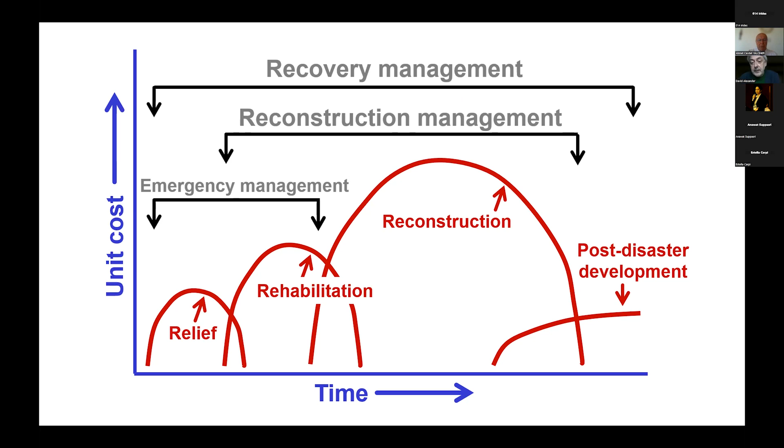It's interesting to note that several research groups around the world have ascertained that in the case of earthquakes, the principal cause of earthquake disasters is corruption. A great deal of money is likely to move around in the post-disaster period. The question is, where does it go? How well is it accounted for? Have we kept out money laundering and organized crime? Do we have transparency in the allocation of post-disaster resources? If not, then we can find that the curve for reconstruction tends to balloon.

Let's also remember that during the process of reconstruction, which might last 10 years, might last 20 years, might in exceptional circumstances last longer - and that is assuming it functions, because in fact we can find situations where reconstruction does not occur, as has happened, for example, in Nicaragua.

But conditions will change between the beginning of the reconstruction process and its conclusion. Those conditions will involve the value of money, the rate of inflation, the demographics of the area, the economic growth rate. Reconstruction can cause a boom and bust economy if we don't construct some means of maintaining the economic impetus after reconstruction has begun to subside or has in fact succeeded.

The goals and objectives of reconstruction can also change because society is dynamic and its requirements, its wants, can change, and of course so can the conditions in the global economy, the national, the regional and the local economies.

Now, we've got plenty of material on how to reconstruct well. We've got plenty of analyses by Turkish engineers, who indeed are excellent, of how to produce good buildings and how to recognize faults in the design of buildings to ensure that they are not perpetuated in the future. Let's hope that that extremely precious store of knowledge is used in the future.

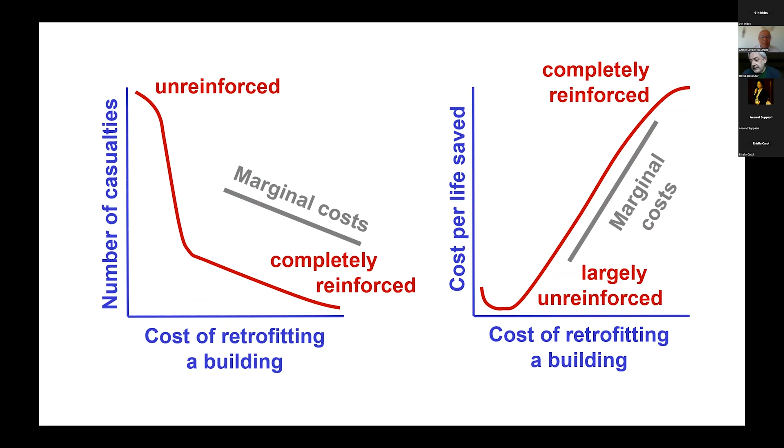However, we then get to a situation where the marginal costs diminish, and therefore the incentive, at least in purely monetary terms, to create further safety is reduced. That, of course, avoids the moral imperative of it, because the moral imperative is indeed to provide safety, not at any cost, because resources are finite, but certainly bearing in mind what the opportunity costs are for providing safety in different ways to different hazards and different threats.

Who does the reconstruction? Who finances it? Who assesses the damage and how? Who establishes the quality standards? Turkey has excellent current building codes. Let's hope that they will be respected in the process of reconstruction. Money saving, as we know, can be fatal in this process.

Much, of course, has to do with how people perceive risks and what the discourse, the debate in society is about the process of risk reduction. Is risk constantly on the agenda? Is risk reduction constantly on the agenda? Is there a demand, and is it a substantial demand, for risk reduction?

That is conditioned in part by experience, especially very recent and very substantial experience, as we see in northwest Syria, southern Turkey. But it is also conditioned by daily living conditions and with priorities that people have in life. It doesn't follow necessarily that seismic risk reduction will be among people's principal priorities. It all depends on what else there is, but that doesn't make it any less of an imperative when it happens.

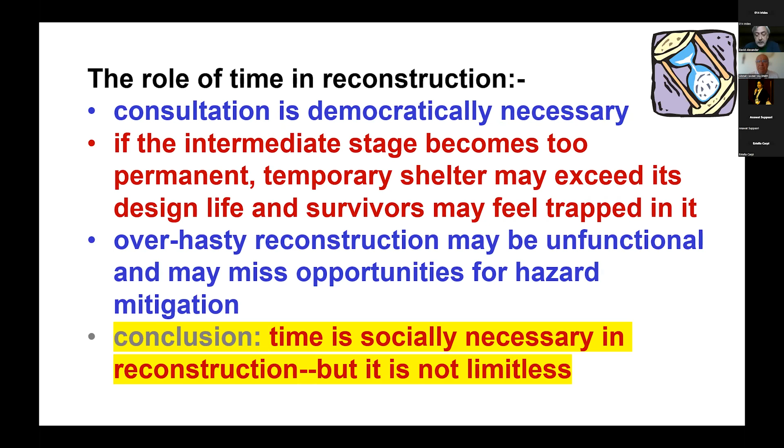On the other hand, we also need to ensure that reconstruction is not over hasty. It will require, for example, geotechnical surveys, and detailed urban, regional, and mitigation planning, and that takes time. But time, of course, is not limitless.

Reconstruction, moreover, needs to be sustainable. That means that the economy needs to flourish. It needs to survive not merely the disaster, but the process of recovery afterwards. We need regeneration of the local economy, and that is often a very demanding sort of problem.

We need to preserve the spirit of place. This is what people connect to. It is how they conceptualize their own environments. If we destroy it by a soulless form of reconstruction that fails to take account of the spirit of place, then we are going to have problems in the future.

And above all, we need reconstruction that does not fuel conflict, that is not divisive. Democratic input is absolutely vital to that process.

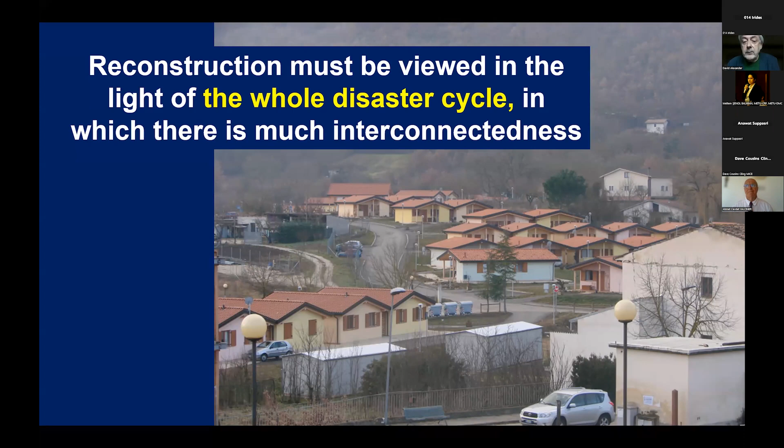So very finally, let's remember we're dealing not merely with a physical recovery, but also with a social, psychological, and economic one, and the connections between these three domains are absolutely vital if recovery from disaster is to succeed. That requires an agency that will, probably at the national level, connect up the various elements and ensure that they work together at the recovery process. This is what we need.